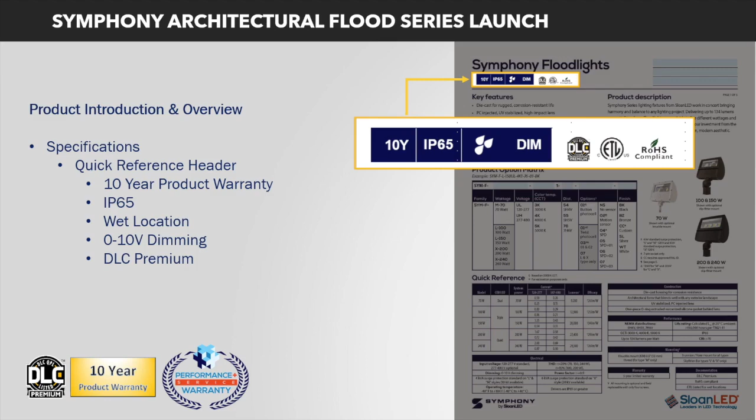Directly below the top header are the luminaire's key features. I've called out a few of these to the left. The fixture has a PC-injected UV-stabilized high-impact lens, and the gaskets are one-piece extruded vulcanized silicone, and that design allows us for direct upward aiming with no fear of water intrusion.

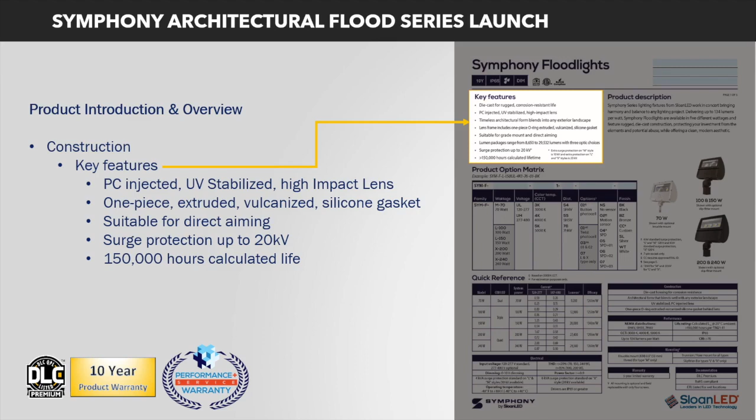Surge protection is available up to 20 kV. I'll cover that a bit more later. And the calculated life is 150,000 hours. The available finishes are black, bronze, silver, white, and custom finishes are also available.

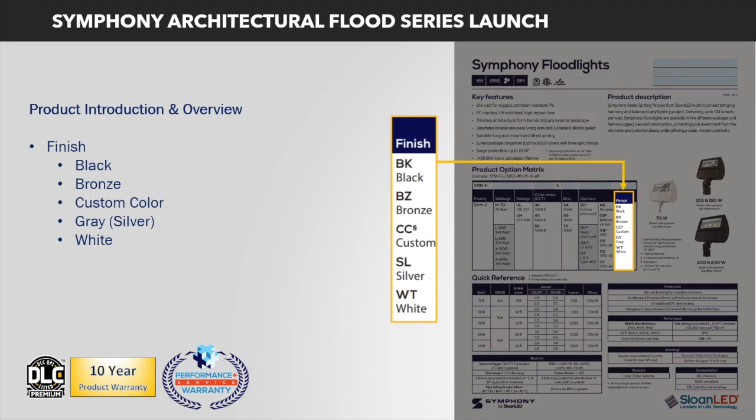The series has 3 physical sizes and 5 wattages. The medium size is 70 watt. The large form is 100 and 150 watt, and the extra large form is 200 to 240 watts.

The luminaire has 5 lumen packages. The 70 watt fixture is 9,200 lumens. The 100 watt fixture is 12,900. The 150 is 20,000. For the 200 watt, the lumen output is 27,400, and the 240 watt fixture is 29,500 lumens. These are all based on a CCT of 5,000.

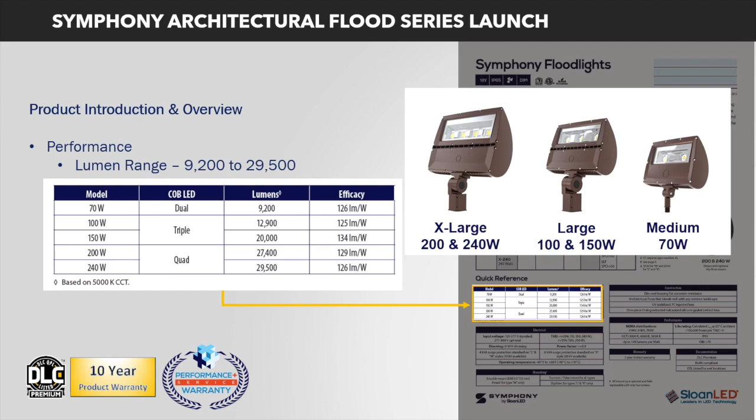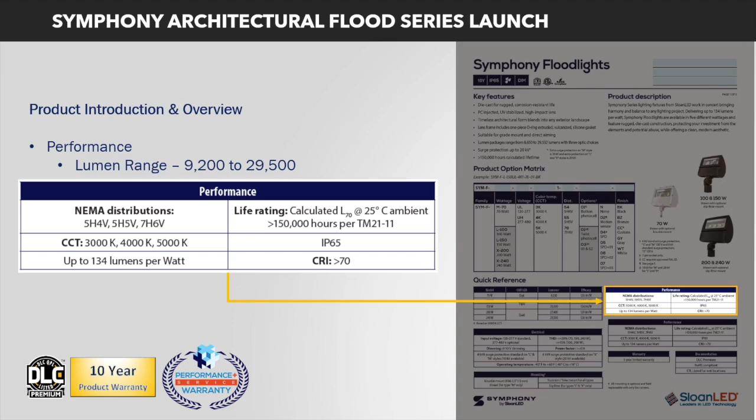Additionally, on performance, distributions are 5x4, 5x5, and 7x6. Available CCTs are 3,000, 4,000, and 5,000 K, and we covered the 150,000 calculated life and IP65 rating earlier.

As far as the electrical ratings, the series is available in both 120 to 277 volt and 347 to 480 volt configurations, and 0 to 10 volt dimming is standard. For surge protection, both the medium and large sizes are standard with 4 kV with an option for 10 kV. For the extra large, the standard surge protection is 6 kV with an optional 20 kV protection. If your specification or project requires a different surge protection, please reach out to any of us at SloanLED to review your needs.

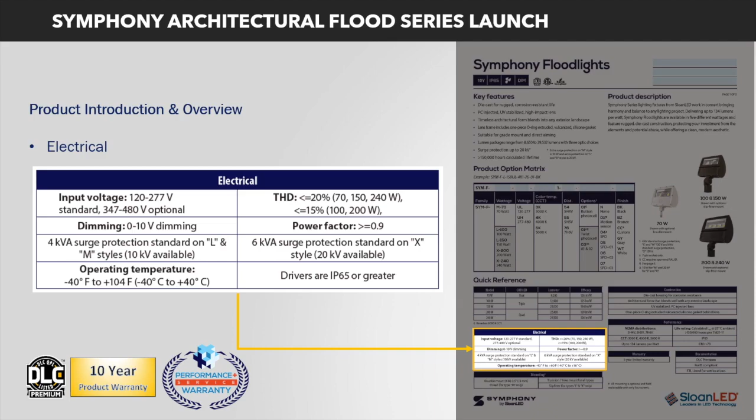The mounting for the Symphony series are ordered, priced, and shipped separately. 3 options are currently available. A slip fitter mount for 2 3/8 tenon. The slip fitter is adjustable and is also indexed to allow for simple and consistent aiming. The slip fitter mount is only available on the large and extra large forms.

Next is the knuckle mount. The knuckle mount is also indexed and is available for the medium size only. Last, we have the yoke mount. This is available for all 3 forms and has 9 indexing holes that allow the fixture to be aimed, then locked in place to prevent movement and loss of aiming.

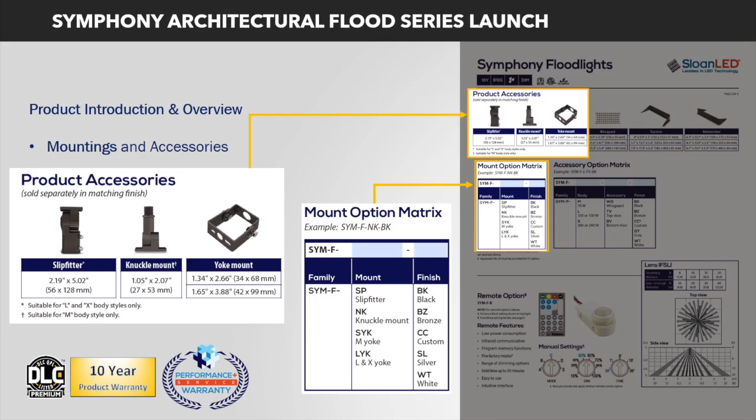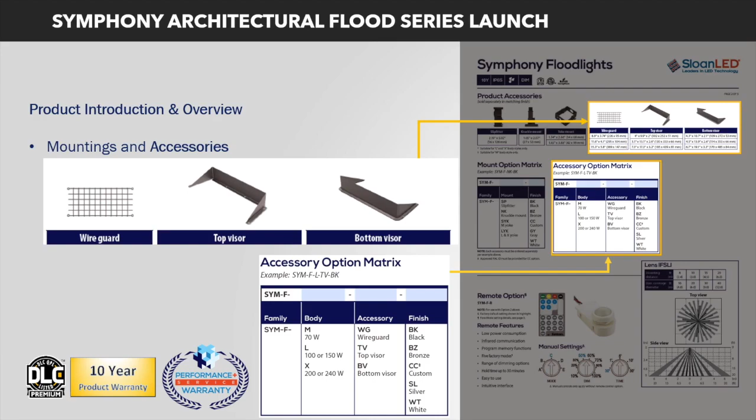For accessories, there are 3 options: a wire guard, top visor, and bottom visor. Each of these are ordered separately and shipped separately, and each of these accessories are color keyed to the fixture finish.

Moving on to controls. The standard control options for the medium 70 watt fixtures are a button style photo control and a PIR motion sensor. For the large and extra large 100 to 240 watt fixtures, the options are a 7-pin photocell receptacle and a PIR motion sensor. I'll review the PIR motion sensor functions next.

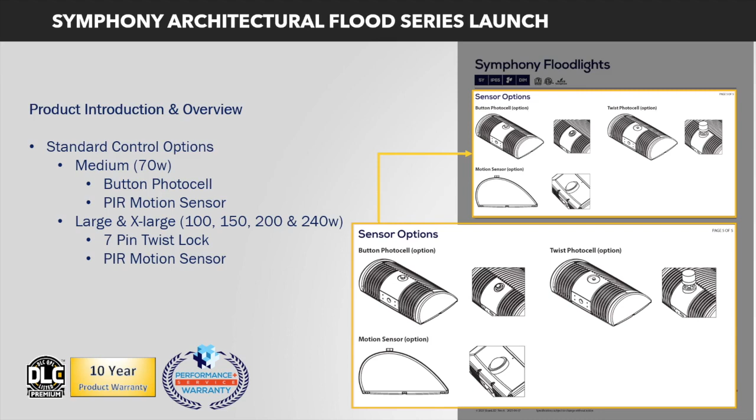The PIR motion sensor ships with 2 sensor lenses. The standard, which is installed on the fixture, is a 1:1 mounting to effective coverage ratio. If the fixture is mounted at 30 feet, the effective coverage diameter is 30 feet. This second lens, for the lower mounting heights, is a 2:1 ratio. So mounting a fixture at 10 feet, the effective coverage area would be 20 feet.

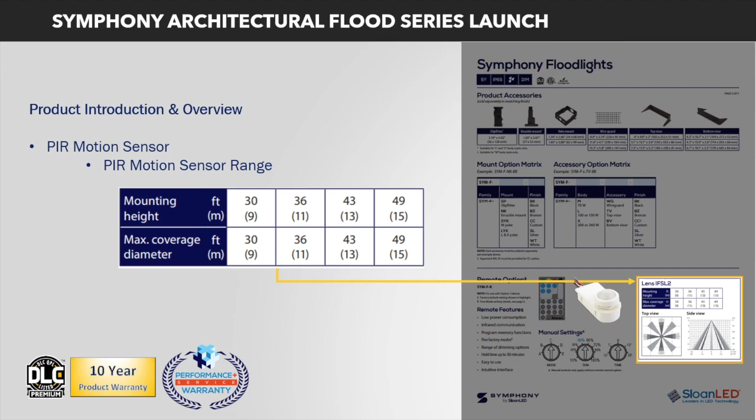The PIR motion sensor has 3 manual settings. You can access these settings by removing the twist lock sensor lens. These settings allow you to adjust the dim levels from 10 to 100% and the time delay from 30 seconds to 30 minutes. There are also 5 mode settings, from A to E, which I'll review.

All these settings can also be programmed using the optional handheld remote. The push buttons on the remote directly match the mode, dim, and time settings on the sensor, making it intuitive and simple to use. Let's take a closer look at what the A through E mode settings are.

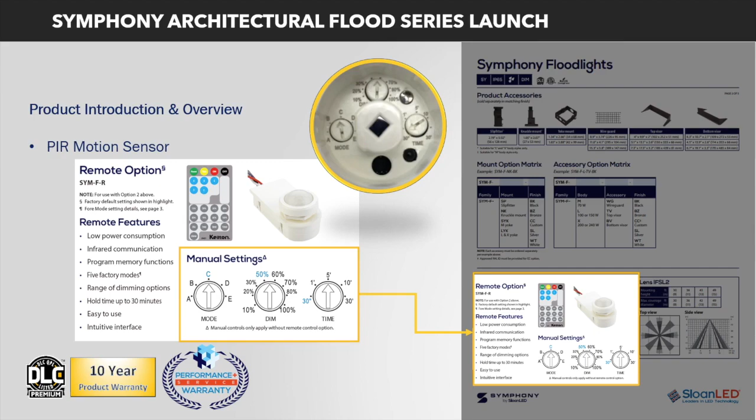Mode A is also the factory default. In this setting, the luminaire will turn on at dusk to the preset dim level. When motion is sensed, the fixture will ramp up to 100% output. When motion is no longer sensed, and after the set time delay, the luminaire will return to its preset dim level. The fixture will then turn off at dawn.

In mode B, the luminaire will turn on to full output at dusk once motion is sensed. After no further motion is sensed, and after the preset time delay, the fixture will dim to the preset dim level. If no additional motion is sensed, the fixture will turn off after an additional 50% of the time delay setting is reached. For example, if the time delay is set for 30 minutes, after motion is stopped and 30 minutes has passed, the fixture will turn off after an additional 15 minutes.

In mode C, the ambient light level portion of the sensor is turned off. The fixture will turn on to full when motion is sensed at any ambient level. After no further motion is sensed, and after the preset time delay, the fixture will dim to the preset dim level. If no additional motion is sensed, the fixture will turn off after an additional 50% of the time delay time setting is reached.

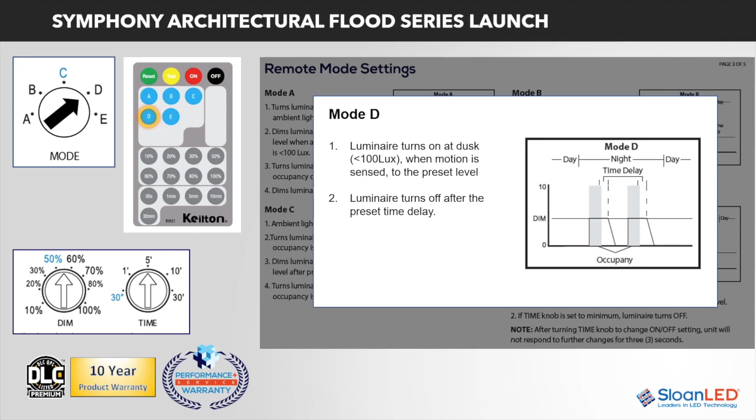In mode D, the fixture turns on to full at dusk and when motion is sensed. The luminaire then turns off after the preset time delay. Mode E is the test mode that allows you to visually test and determine which dim level is best for your application. Setting the timeout to maximum, you can then test the 8 dimming levels and determine which is best for your application. When you turn the timeout to minimum, the fixture will turn off. You need to allow 3 seconds between setting tests.

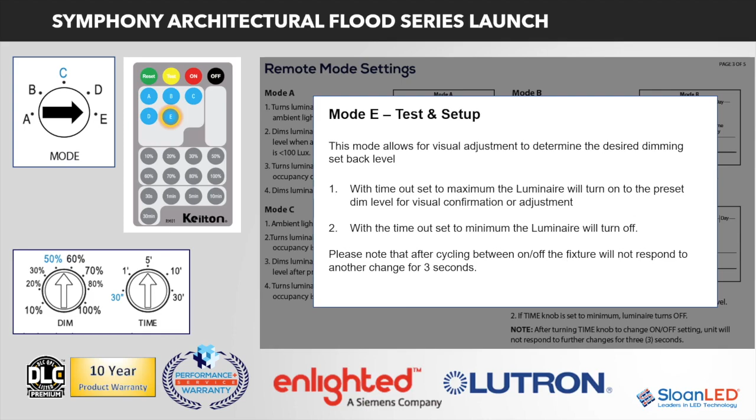Now let's look at the product number sequence, paying special attention to the controls options. The product number sequence is intuitive. In this case, the SYM-F for Symphony Flood, L100 for large body, 100 watt, UL for universal low voltage, 4K for a CCT of 4000.

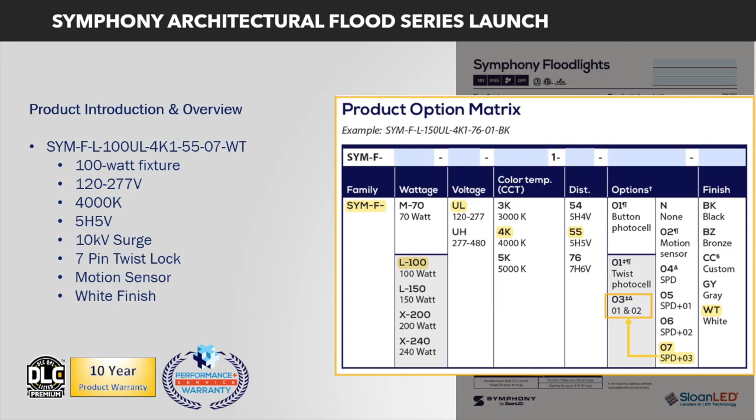For options, in this example, a 07 was selected. The note under the 07 option is SPD plus 03. The SPD stands for the high-rated surge protection, in this case, 10 kV. The 03 refers to the control options noted to the left as highlighted here. The 03 represents both the 01 photo control and the 02 motion sensor option.

We've made note of the fact that we are increasing domestic production at our Ventura location. I'm happy to announce that the Symphony Flood Series product line is one of those products, and it is built in Ventura. As noted earlier, the official launch of this product is on September 23rd. At that time, all documentation, IES files, etc. will be live on our website. You'll also notice that there is a product identification label located under the lens. There is also a QR code that will take you to the product information on the website. This will also be active on September 23rd.

The standard lead time we're quoting for this series is 4 to 6 weeks, which does include custom finishes. If your requirement is inside of that lead time, please reach out to us and we'll do our very best to accommodate your request.

As noted earlier, this series has a 10-year product warranty. I wanted to take this opportunity to remind you about our 2-year Performance Plus warranty. Under this warranty, should any Sloan LED lighting systems product fail in the first 2 years, we will repair or replace the fixture on site completely turnkey. This means we will send our labor along with the necessary materials and equipment to the site to make any necessary repairs. Keep in mind there is no additional cost to you or your customer, just another way that Sloan LED has your back.